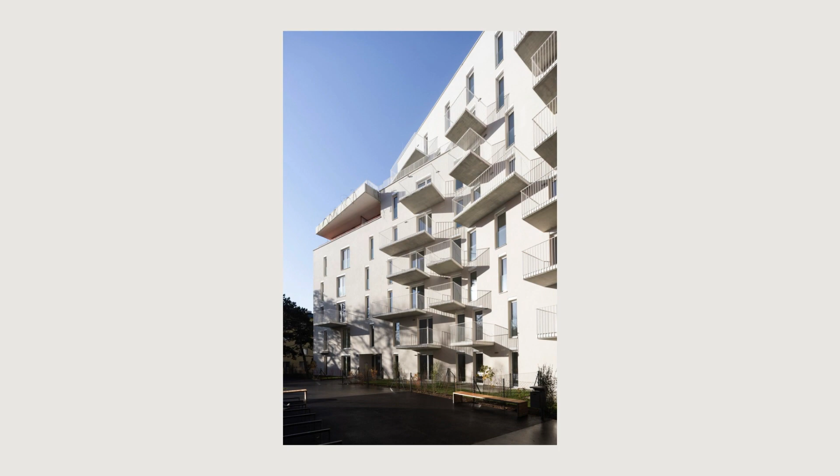Berger+Parkkinen, who was awarded the Austrian State Prize for Architecture and Sustainability 2021, provides another example of their expertise in future-oriented, ecologically conscious architecture with this project.

The design of the Wientalterrassen residential complex emerged in 2018 as one of the two winning projects for the Dorsch-Gasse location from a developer competition organized by BB Immobilien Management GmbH and Wohnfonds_Wien.

After 3 years of construction, a 30,000 square meter residential complex was created, offering various housing options oriented toward different lifestyles. The project comprises a total of 295 flats, 196 subsidized rental apartments, 99 smaller smart flats, as well as 2 shared flats for children and young people and 2 assisted units for people with special needs.

In addition, the complex includes a day center run by the administration of the Wiener Pensionist Innenheim, Vienna Retirement Homes, which connects generations, as well as another day center for external wheelchair users and office space.

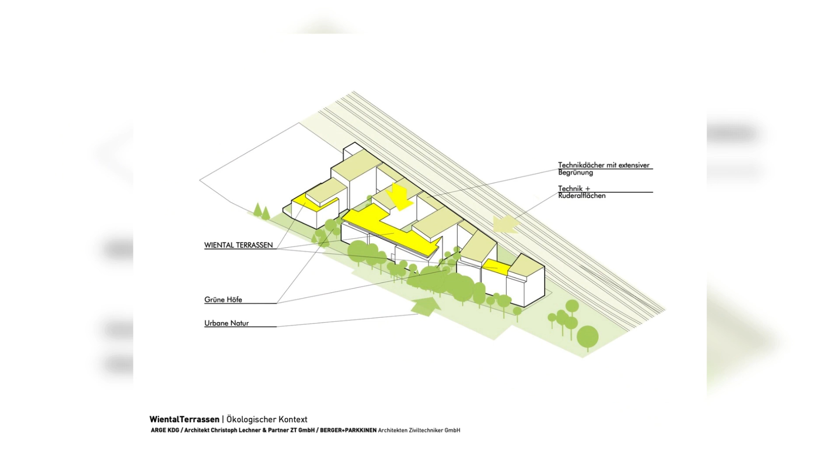The ensemble consists of 5 houses across the Vienna River and connecting buildings along the valley. The north side facing the railway appears as a long, rhythmic arch with individual glazed openings into the inner courtyards. The partially open and partially closed courtyards are the heart of the complex and are ideally suited for outdoor communication and interaction.

In order to make the special location in the Wiental an experience for all residents, generous terrace areas are planned above the lower, south-facing components. In their staggered arrangement, also in terms of height, the 3 Wientalterrassen offer a special open space for the people living there. The difference in height to the railway site in the north is characteristic of the project.

In accordance with the dedication, the building structures descend from the higher railway level towards the south and the existing residential buildings. As a result, all flats are oriented exclusively to the south, west, and east.

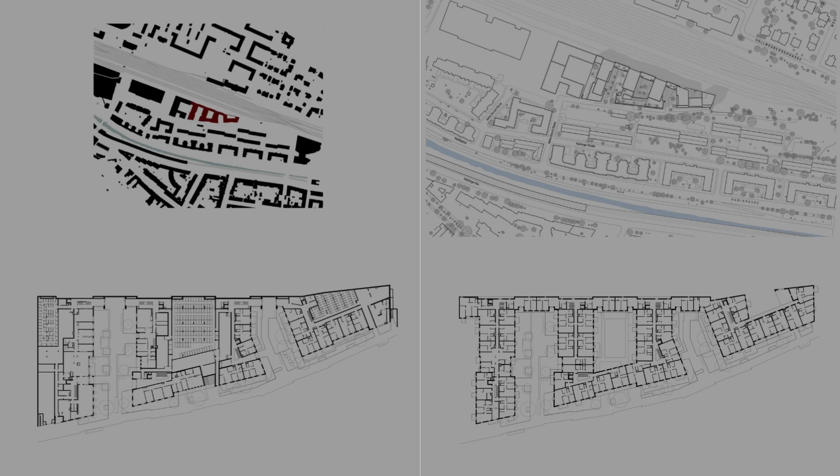The planting of the inner courtyards, roofs, facades, and the 3 communal terraces creates a diverse flora that is intended to help combat the urban heat islands that arise in summer.

The floor plans can be modulated in a variety of ways and are designed to be flexible. Only lightweight walls were used in the flats. In some areas, there are also switch rooms that can be closed or separated without too much effort.

By removing partition walls between the living and sleeping areas, loft-like, open-plan room structures can also be offered. Both the division into smaller units and the connection to even larger units are thus provided for in the residential complex. Arbitrary adaptations for surgeries and offices of different uses are also possible without any problems.

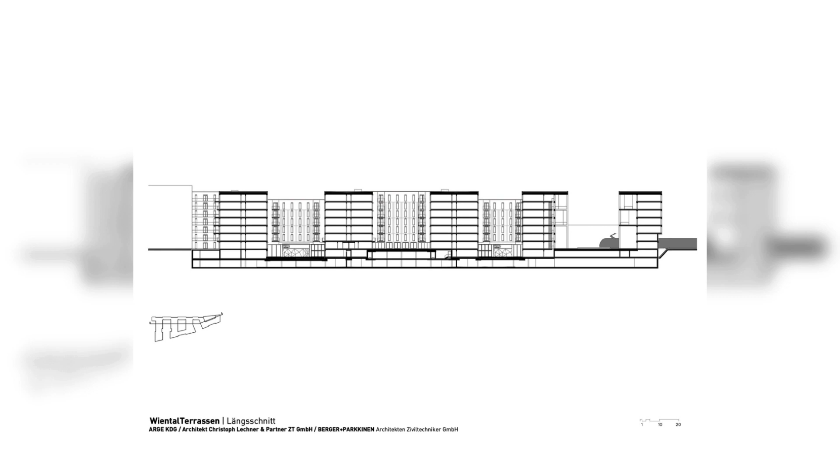The resulting flexibility is also an essential quality of the design in terms of sustainability. The Wientalterrassen residential complex is characterized by a number of innovative sustainability features that set it apart from other construction projects in Vienna.

One of the special features of the project is the extensive use of green roofs and solar panels, which not only improves the design of the buildings but also offers important environmental benefits. The Wientalterrassen also features a state-of-the-art solar panel system that helps to significantly reduce the project's carbon footprint and energy consumption. The solar panels are integrated into the design of the buildings, creating a seamless and visually appealing aesthetic.

Heat is supplied by a geothermal system consisting of 2 deep probe fields and a solar absorber system, as well as 3 heat pumps. In addition to these elements, Wientalterrassen also integrates energy-efficient systems throughout the building, including high-performance windows and insulation, and water-saving fixtures in all bathrooms.

The development also includes an on-site recycling system that promotes a sustainable lifestyle for its residents and visitors.

One of the most striking aspects of the residential development is the rooftop garden and terrace, which offer panoramic views of the city. The terrace is designed as a public space for the community and encourages outdoor activities and social interactions. The roof garden also serves as an environmental buffer that helps reduce the urban heat island effect and provides an urban oasis for city dwellers.